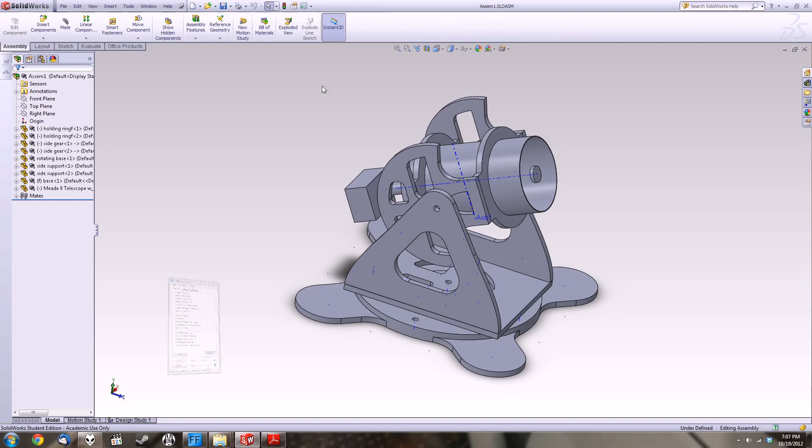Alright guys, on this week's video we're going to be going over exploded views of assemblies and a few advanced drawing features. So to get started off, to do an exploded view, just open up the assembly. This is actually your homework part, it's the one we gave you guys on D2L.

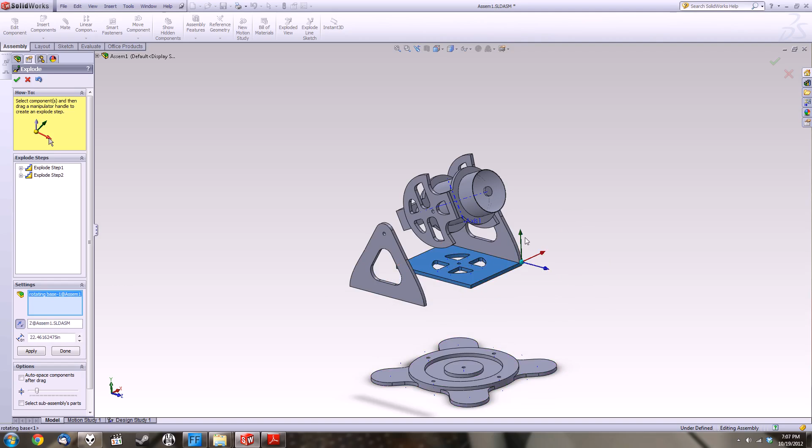And then just get to the regular assembly tab and then just click exploded view and then just start picking up the parts that you want to move from the regular position. This is mainly for if you want to show how a part goes together without actually having two complete versions of it in SolidWorks. It'll let you kind of get some more space around everything so it's a little less cluttered. So what I'm doing here is, all I did was click on that button.

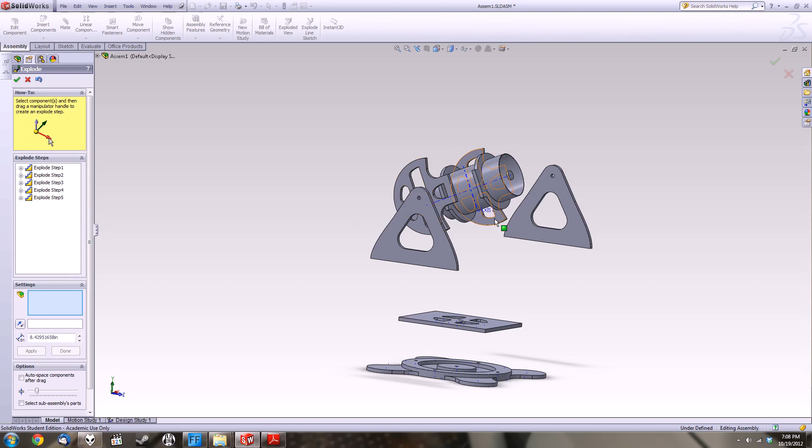I'm still in this explode feature, and all I'm doing is clicking on the part and dragging this little origin piece away, and I'm picking up whichever axis I want to move. So if I want to move this up, I can do that. If I want to go back, I can just delete this step 6, and then let's say I actually want to go out with it. So I'm going to pick up this arrow and drag out just a little bit. And that'll get you pretty far in this.

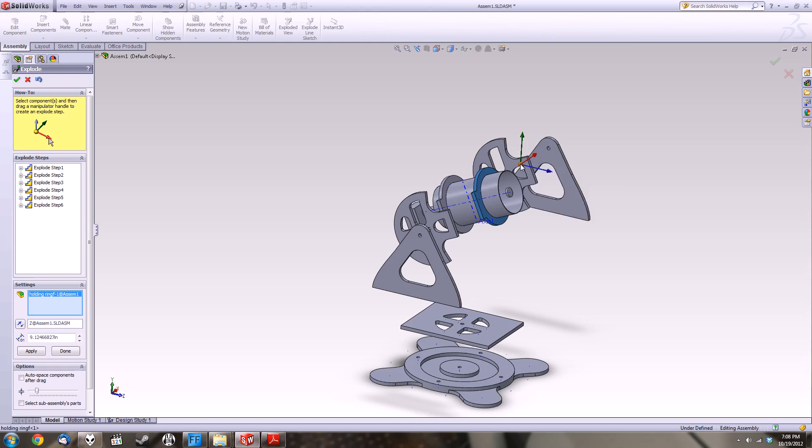You'll notice that when you try to move these rings out there, these arrows are still in the cardinal directions with respect to the assembly. So to do that, you have to do a little extra step. I'll go ahead and delete this step 7, but click on it and then right click on this little ball in the middle of your origin and say align to on here. And when you click that align to, then you can pick a face that you want to be perpendicular to. I'm just going to click the part itself, and you'll see that this origin snaps in place.

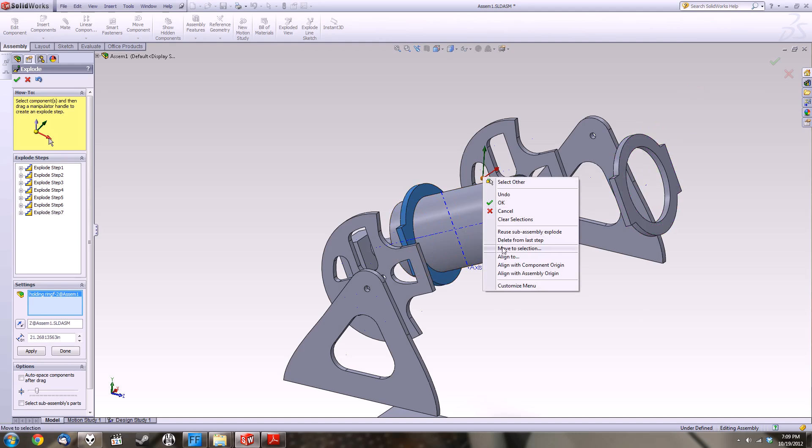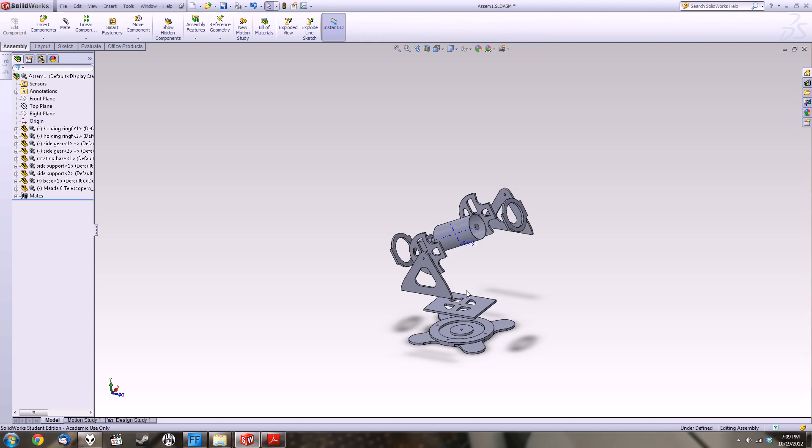So after that, I can just do like normal and click and drag and move that part away a little bit. And I'm going to go ahead and do this one more time for this part. So align to that face and then move it back a bit. So that's great. I'll click check on the explode, and now you can see really clearly how everything goes together, where you can see each part individually without having to change things to transparent or anything like that.

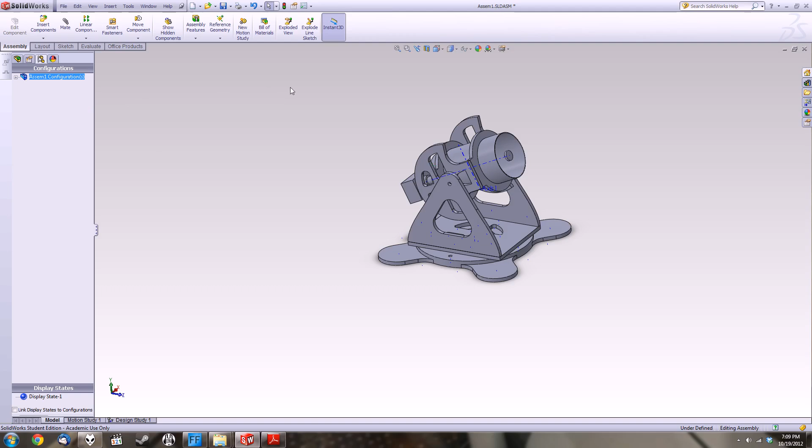So let's say you want to go back, you can just right click in white space over here and just say collapse. And the part goes back to normal. You still have just one version of this part, and you don't have to change anything. You'll also notice that over here in the tree on this third tab, you now have an exploded view over here. So if you ever want to go and mess with the actual settings, you can over there. So I want to create it again. I'm just going to click exploded view, and it saves all my settings. So all I have to do is click check, and it's back exploded again.

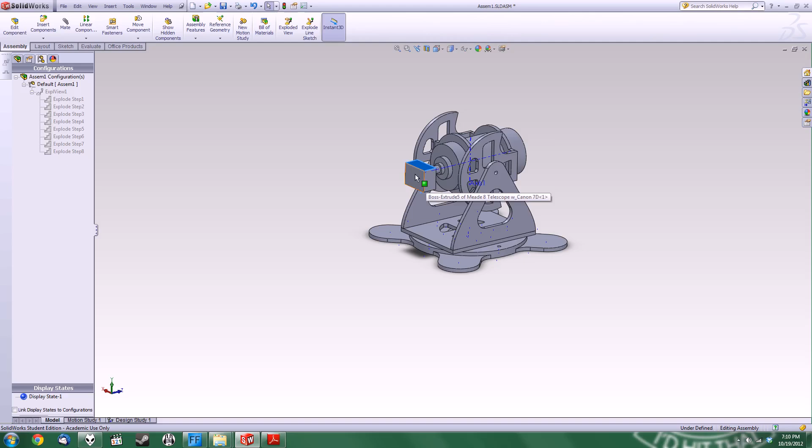So one more thing we wanted to go over before we get to drawings. SolidWorks is actually very, very nice for doing collision detection of assemblies. You'll see that this camera piece can actually move up and down with the rest of the assembly. But it's pretty close to this bottom plate here. We don't know if it actually touches. It may not. And one way to check that is actually to go into this Move Component button and turn on collision detection here. And once you click check on that, you can actually move it over.

Actually, I'll have to do this again. Collision detection, move it over, and then whenever it hits, the part that it hits turns blue, and then it plays the little Windows "you've done something wrong" sound. So, kind of handy to have if you're ever doing a large, complicated assembly where it's not obvious if things are going to interfere or not. That's really handy.

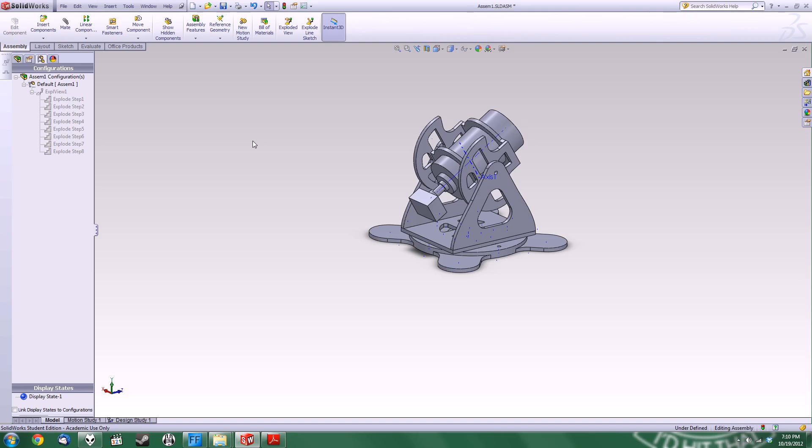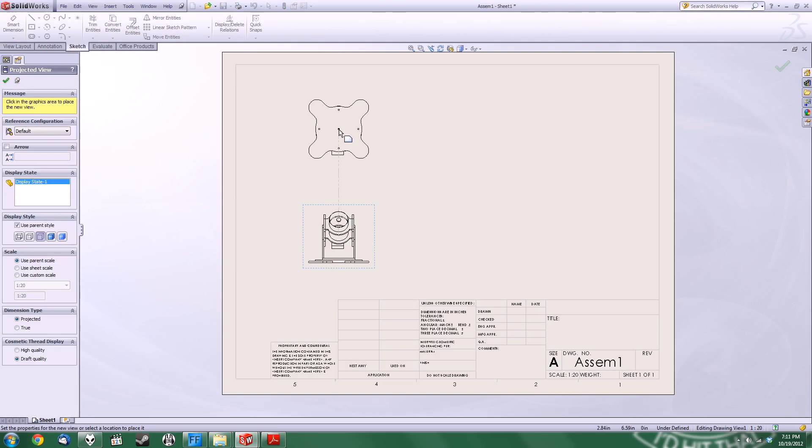Alright, so moving on to drawings, I'm just going to create a new drawing, and I'm also going to pick up a landscape. This is the ANSI version. And then I'm just going to go ahead and insert a regular 3 view like you've done just on your last homework. I'm going to go ahead and throw an isometric in there too. And what you'll notice on this is it's backwards from what we want you to do on your homework. And since you all have the same part, this isn't because you created your sketches slightly differently. This is just because of a sheet setting called first angle versus third angle projection.

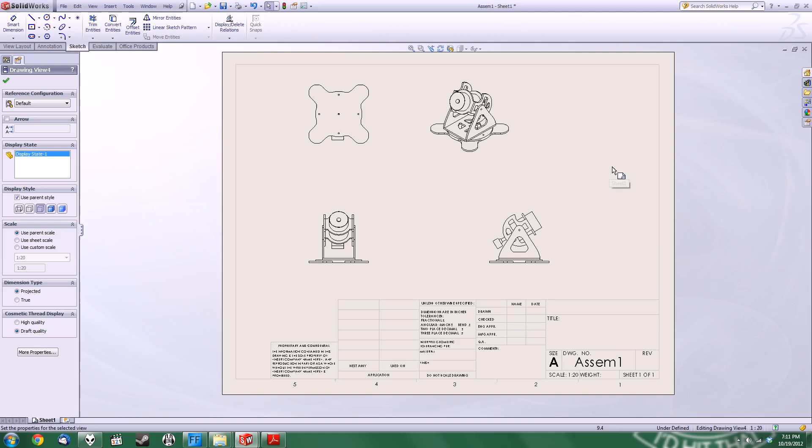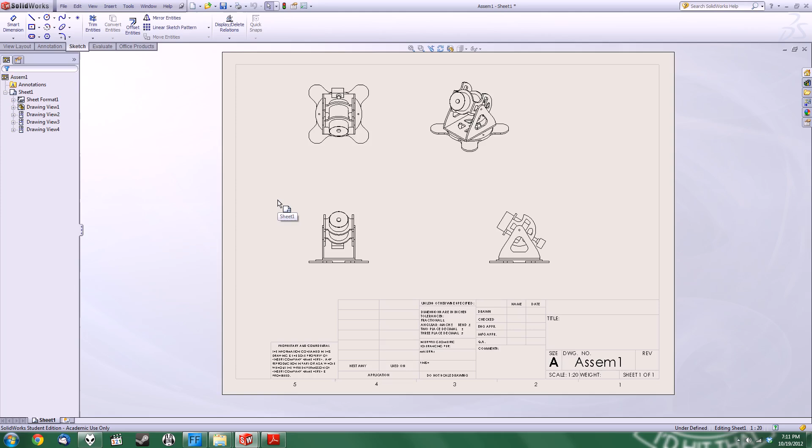And to go through and fix this, you can just right click in white space over here, go to sheet properties, and I think I clicked the wrong one. Go to sheet properties and click third angle here instead of first angle projection, and then it flips it around so that you've got a front view, a top view, and a right view instead of a left view.

Then like normal, you can just go through, change the scale on these if you'd like. I'm going to use a custom scale, so just click custom scale, scroll up to user defined, and I'm going to make this 12, and then that scales the whole drawing.

So for this first sheet, add a few dimensions on it. I just picked up Smart Dimension up there in the annotation menu, and then I'm just going to put a dimension right there. That should be all you need to do on this first sheet.

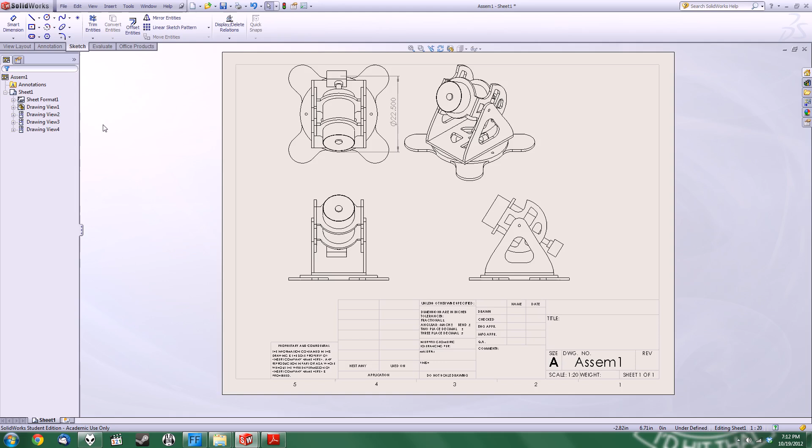For the second one, it's usually better, instead of creating a whole new drawing file, just to right click on sheet 1 and just say add sheet here. So now we've got multiple sheets within the same drawing file, and this will still all auto update with whatever you're doing on your assembly side.

For this one, the first thing we noticed looking at it, it doesn't have any formatting on the sheet. So to get rid of that, just highlight sheet 2 format here, right click, and say delete. Once you do that, everything goes away.

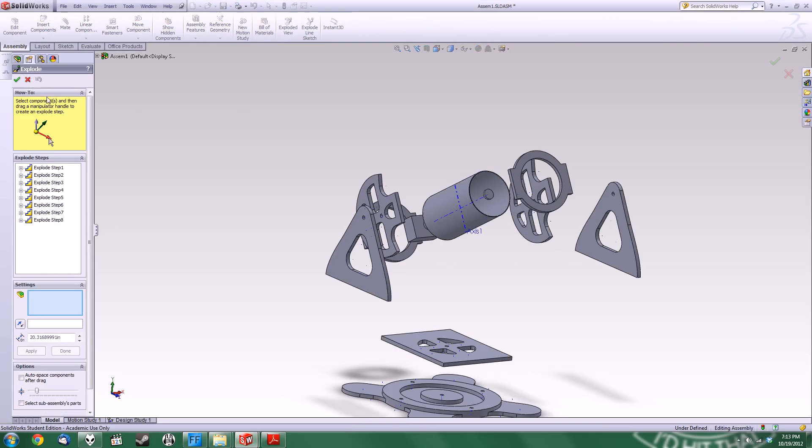The other thing on here, you'll notice they have a view of the assembly after it's been exploded. And probably the best way to do that is to go back in here, recreate your exploded view, and then instead of just trying to put in a view of the current part into your drawing right now, it's better to save a custom view.

So just align it kind of how you want it, and then hit the spacebar like you're going to go normal to, and then hit this top left button up here. It says New View. Once you do that, it'll let you name it. I'm going to call this Explode.

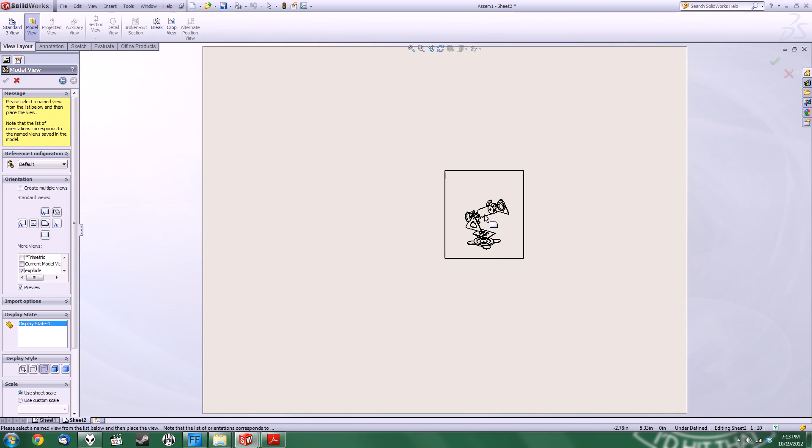And we can close out of that, go into the drawing, insert a new model view, and then once you have that, Explode is already selected. So I can put that view in the drawing and just click yes on that checkbox. Going to isometric doesn't really change anything.

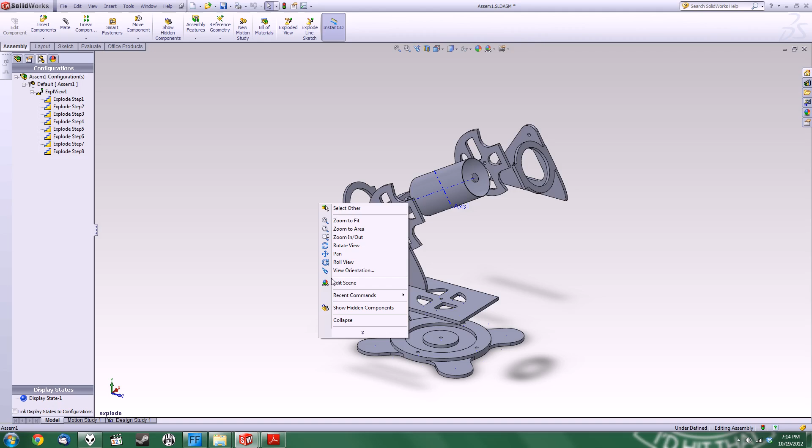Once I've done that, I can just bump the scale up. I'm going to say 1 to 5. That's pretty big. Let's try 1 to 10. That's about right. So saving custom views like that allows you to also go back and make changes to the assembly over here. Say I'll collapse this, and it'll still be okay and exploded in this drawing.

So the other thing on this sheet is they have a bill of materials inserted, and to do that you just go into Insert, Tables, Bill of Materials. Once you just select a drawing, so we want this Explode, and then it'll give you all these options over here. Usually the default ones are pretty good, so we can just click check.

Once we do that, drag over here, we have a table, and we can just put it in the part anywhere we want. Also, this description tab, since we didn't add part descriptions on anything, it's kind of useless, so I'm just going to minimize it down to here and just click and drag on that.

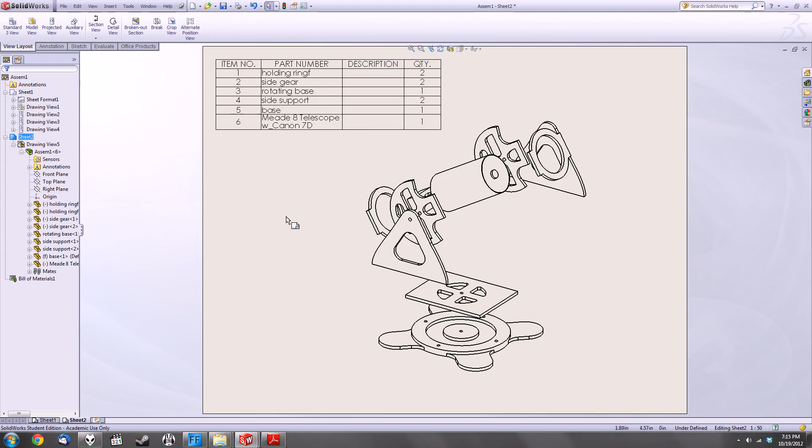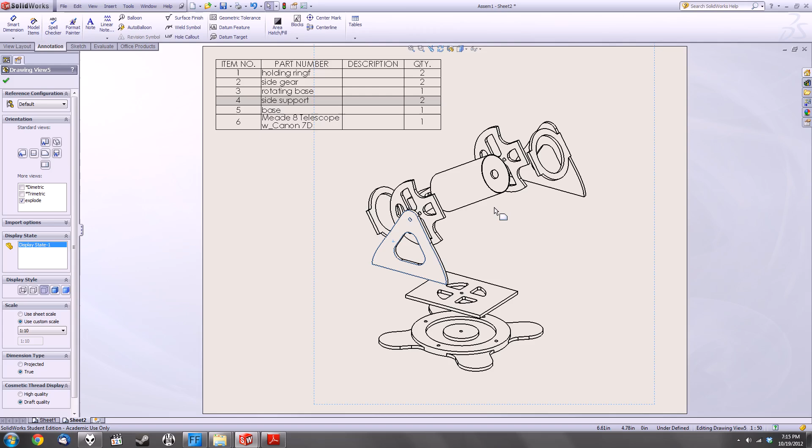Alright, and the last thing, this part also has annotation bubbles on it, showing where each part in the bill of materials is actually located on the assembly. And the easiest way to do that, at least to get started, is to use this auto balloon feature. And to use that, all you have to do is click on any face inside the view you want to put bubbles on, and click auto balloon, and it does it for you.

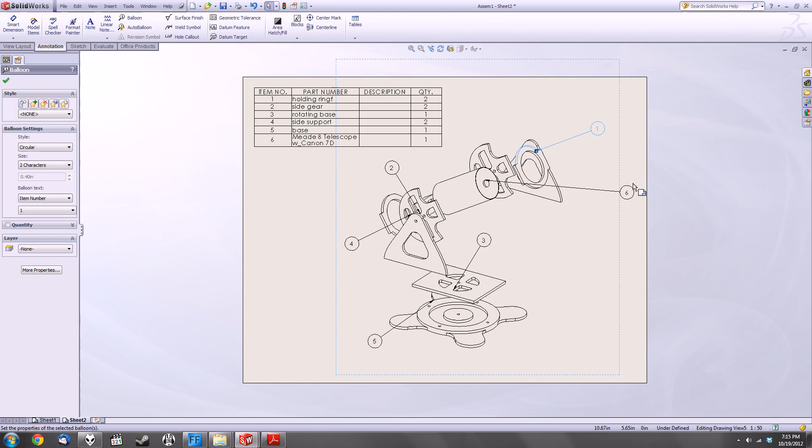Now you'll notice everything's a little bit misplaced. Nothing's exactly where you want it, but just click check for now, and then you can individually drag these things around to where they're a little bit easier to read, and you just want to make sure with this you're as clear as possible as to which part goes where.

You can also, I had 2 of several parts. The auto ballooning only picked up 1 of them, so for something like this, I'm going to pick up this part and go ahead and add another balloon. Same thing for this guy. So that's it for that sheet.

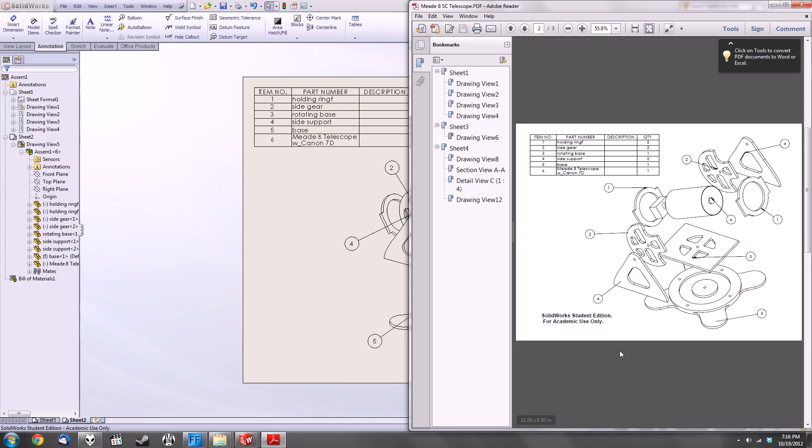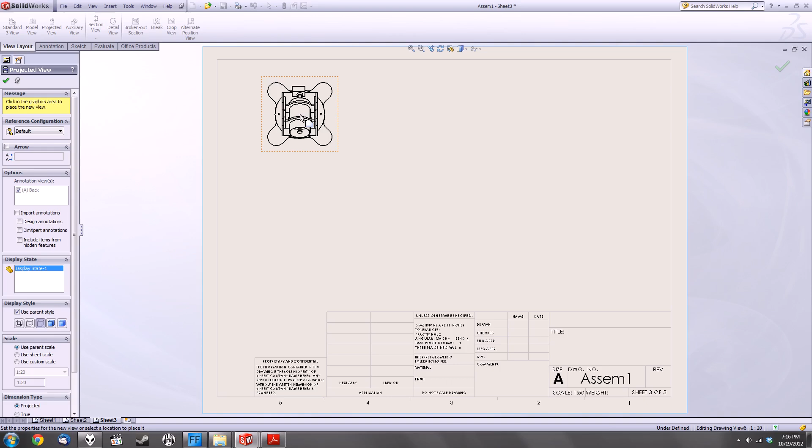On to this last one. We're going to start off just by creating a new sheet again. We can go in and just add a regular model view. In this case, it's just a top view. So we want that one. I'm going to put it right there. And I'm going to go ahead and just check that, and then go back and change the scale over here to user defined and 1 to 10 again.

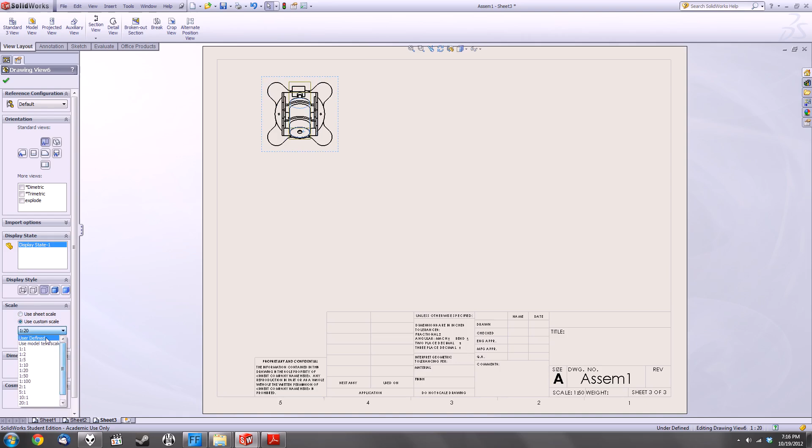Alright, once you do that, it's a little bit closer to the size we want, but you'll notice this isn't rotated the right way. And instead of going back to the part and trying to change it that way with a custom view or something, you can just right click on this one, go to Zoom Pan Rotate, and click on Rotate View, and then just click and drag until it's at the right spot. That time it was just 90 degrees off, so it's rotated 90 degrees. Click Apply, close that out.

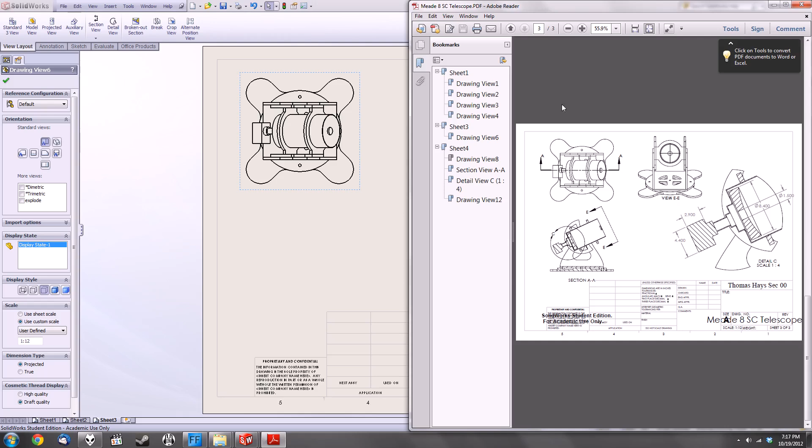First on this sheet, you'll notice that we have this line AA through the part. And what that is, that's a section cut. It's kind of like if you took a very sharp knife through the part or assembly, what would you see after you did that? Yeah, we gave you one on the test, so hopefully you guys are a little bit familiar with that.

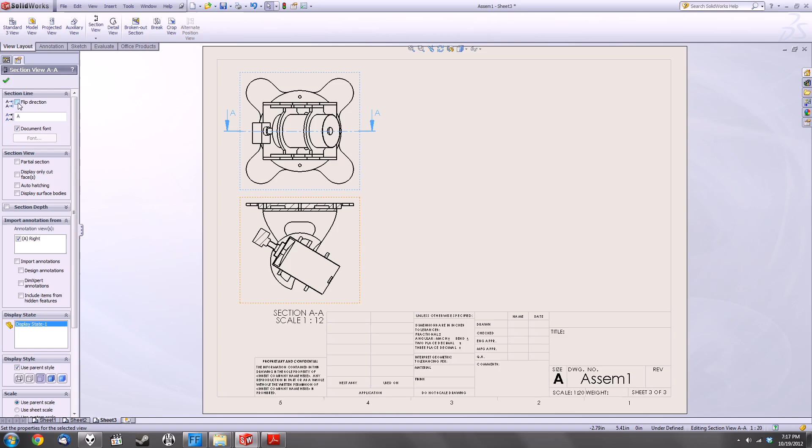To do it, you just go into the View Layout tab, just click on Section View up here, and just draw a straight line through the part. Very simple. Default settings are fine, and then it gives you a projected view off of that immediately. In this case, we want this flipped up, so you have this flip direction part. Click that, and that looks pretty good.

You can also always move these tabs around, or these labels around a little bit, just to make everything clear, so everybody knows if this tab's right here or something. It's really tough to tell what's going on there, so make sure everything's legible.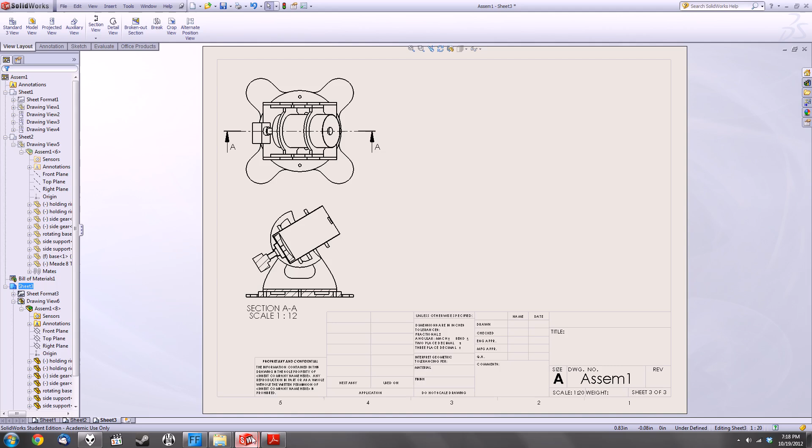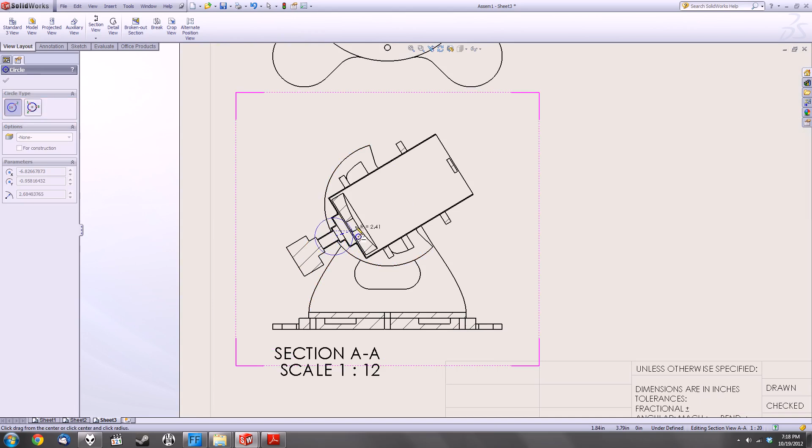Also on this, you can see we've kind of got this B here that's got this circle kind of highlighting this more detailed area of the part, and then that goes over to this detail view B over here. So to create one of those, you just need to click this detail view button, pick where you want the center of that to be. So I'm going to zoom in, try to pick up the midpoint of that line, and drag that to about here.

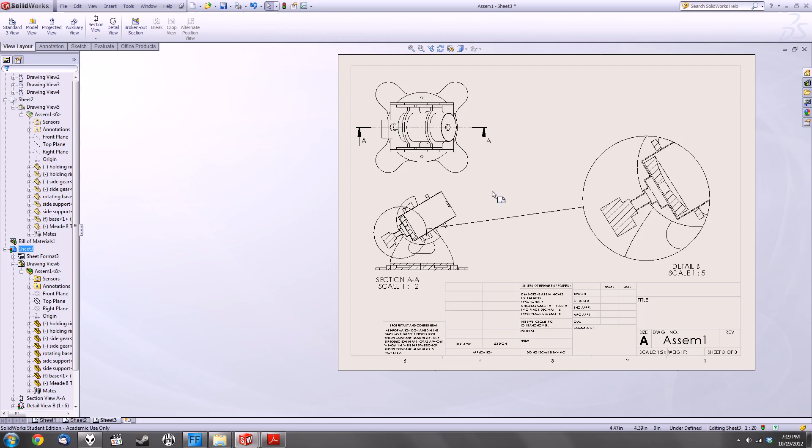So same thing, it already creates the projected view. Drag it over, and I'm going to bump up the scale to 1 to 5. And same thing, I can drag the tab over, and that's good to go.

So the last thing is this kind of perspective view. We've got view C here, and this is going to look a little bit different for you guys. On SOLIDWORKS 2011, it shows both of these arrows, but on 2012 it doesn't. So to actually do this, just get back into SOLIDWORKS, if I can get Acrobat to go away.

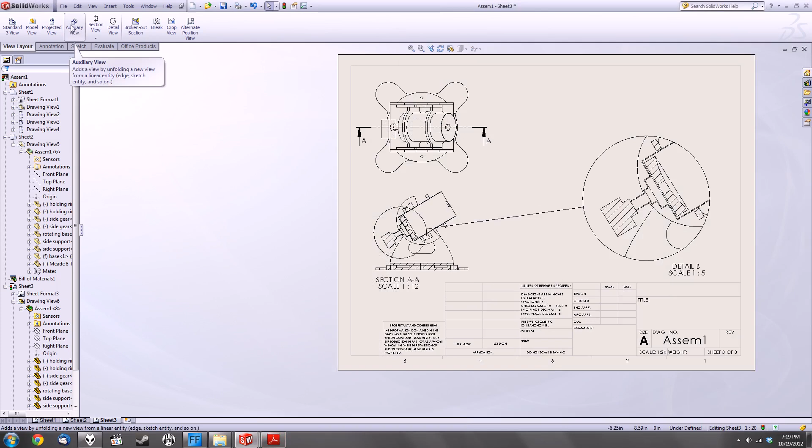Click on Auxiliary View, and then just zoom in and pick up the edge you want to be perpendicular to this view. It doesn't actually highlight it, I'm not sure why, but just zoom in so you're absolutely sure you picked up the right one, and then click. And you see it put a C there, and it gave me a projected view, so I'm just going to click somewhere and put that on the sheet.

I also want to move C around so it's really clear what's actually going on, and I also kind of want to move this up and down, but since it's still a locked projected view, it won't let me do that. To get out of that, you can just right click on it, hover over alignment, and click break alignment, and then you can move it up and down, put it wherever you want. So I click that, move it up here. I'm actually going to do the same thing. Apparently I can't on that one.

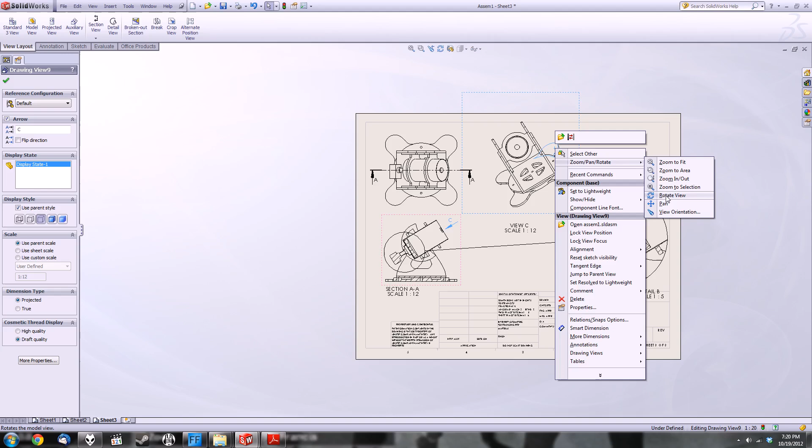There we go. So move that out of the way a little bit, and you'll notice it's also rotated a little bit, so just go back in, Zoom Pan Rotate, Rotate View, and just kind of watch as SOLIDWORKS freaks out and get it as close as you can to horizontal.

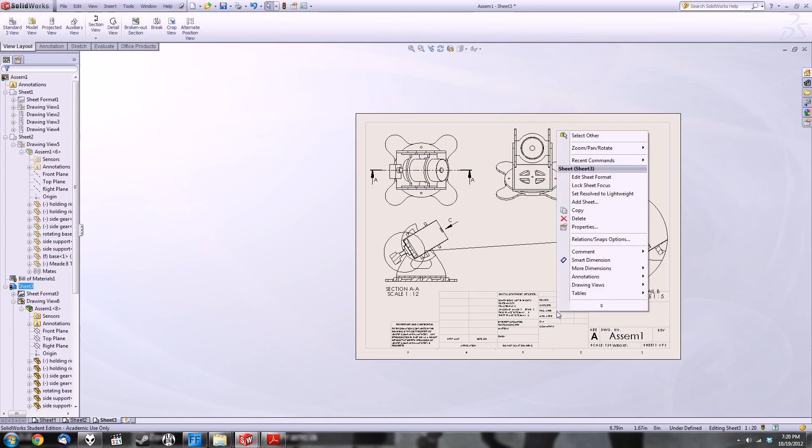With that, just kind of get it centered, get the labels in line, and as well, if you need to go in and add your name or something to it, remember it's always just right click, Edit Sheet Format, go in here, put whatever you want to put in those boxes, and then just click this button at the top right to get out of it.

Otherwise, I think that's all you guys need to know to do your homework for this week.